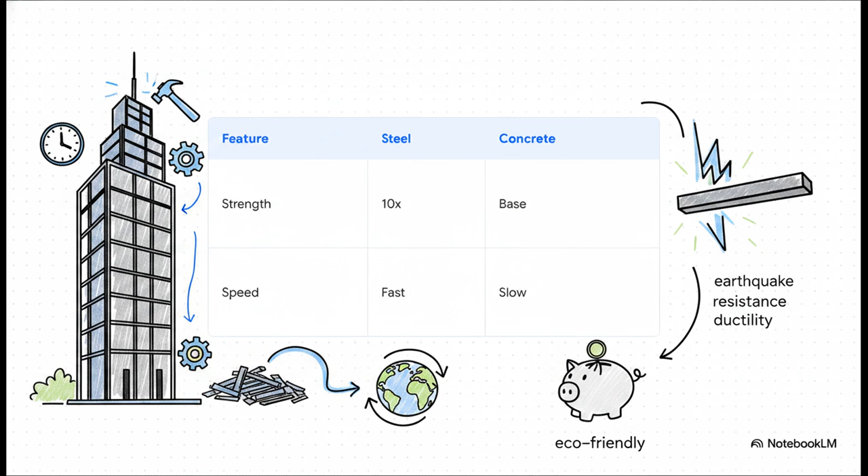On top of that, steel is super ductile and robust. Those are the exact qualities that allow it to withstand severe, sudden impacts, like earthquakes. Add in the fact that it's highly eco-friendly and easily dismantled and recycled as scrap at the end of its life, and you can clearly see why its overall life cycle cost makes it the ultimate choice. Which brings us to Section 2, the secret life of steel.

At its most foundational level, steel is simply iron with a tiny dash of carbon added in. But the magic is really in how they mix. The atomic diameter of carbon is actually larger than the gaps or interstices between the iron atoms. Because of this, carbon dissolves into a solid solution, literally squeezing right into these microscopic gaps. And by doing so, it physically distorts the original crystal lattice of the iron.

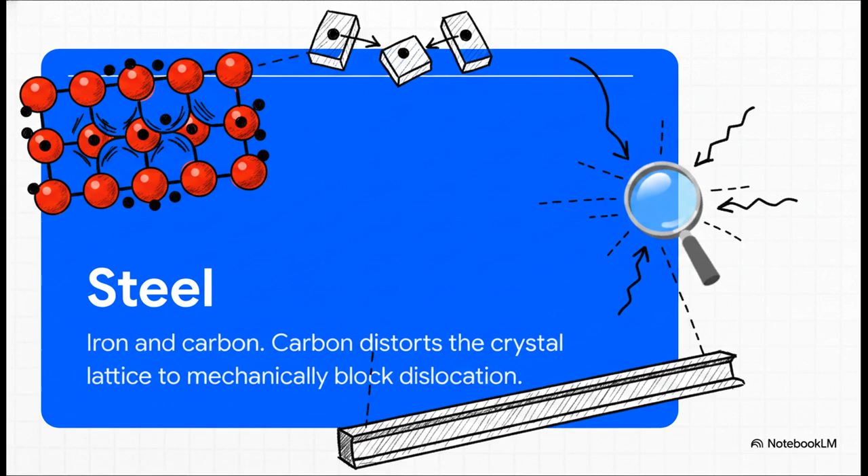You can kind of think of it like wedging tiny blocks into a sliding puzzle. These carbon atoms mechanically block the crystal lattices from dislocating or sliding past each other when a force is applied. That microscopic mechanical distortion, that is exactly what gives steel its tremendous strength.

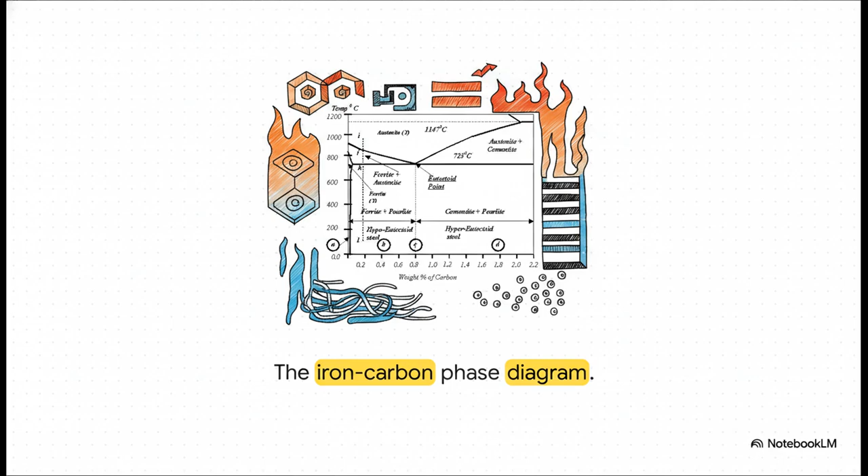Now consider the iron-carbon phase diagram. It's essentially a cheat sheet for metal. As the temperature drops, iron takes on completely different forms. Depending on the exact amount of carbon, which usually tops out at around 2%, that blazing hot austenite cools down into either extremely soft ferrite or a much harder, more complex mixture that we call pearlite. Let's move to Section 3, forging strength and ductility.

Let's walk through the actual steps of slowly cooling a standard 0.2% carbon structural steel. It's almost like a race against time. We start at Step 1, with austenite at a scorching 900 degrees Celsius. As it begins to cool into a two-phase field, we hit Step 2. Ferrite starts to nucleate, forming tiny crystals right around the boundaries of the austenite grains. Because ferrite simply can't hold much carbon, that carbon diffuses away into the remaining austenite.

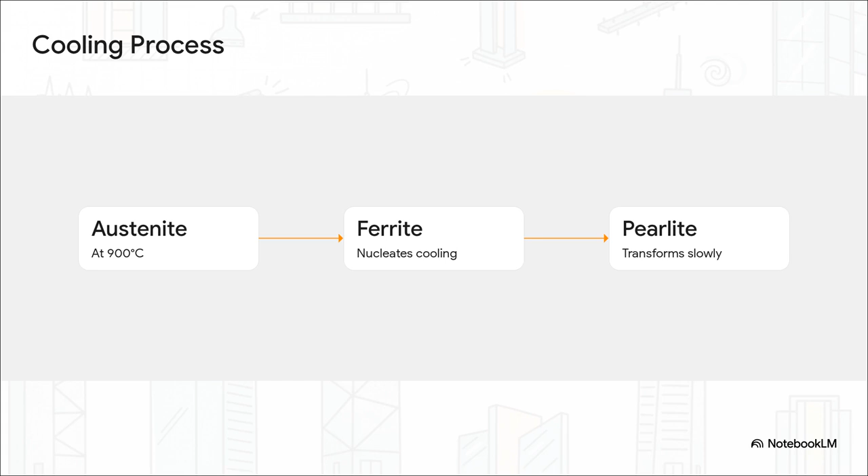Finally, in Step 3, as we cool all the way down to room temperature, that remaining carbon-rich austenite transforms completely into pearlite. We can picture this beautiful microscopic transformation happening in 3 distinct stages. First, you have the large austenite grains with tiny ferrite nuclei forming right at their borders. Next, those ferrite regions grow, effectively pushing the carbon inward. And finally, that center region becomes pearlite.

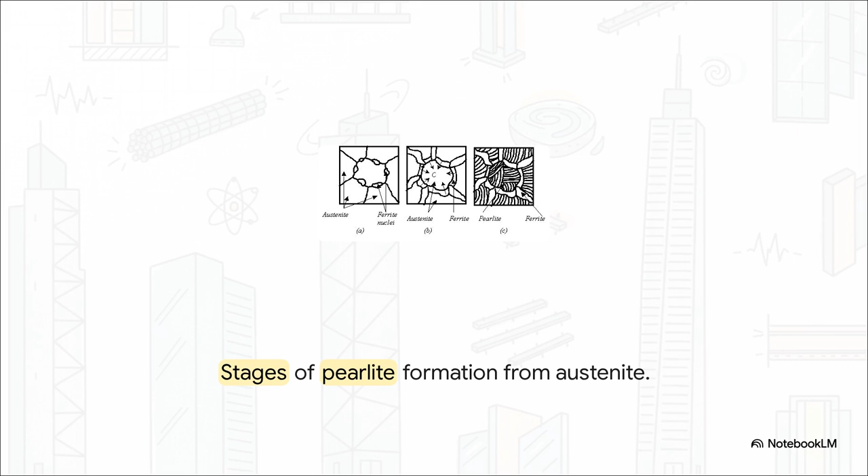Pearlite is a really fine lamellar mixture, kind of like a microscopic layered cake, made of soft ferrite and a hard iron carbide called cementite. The higher your carbon content, the more of this hard pearlite you get. That means higher mechanical strength, for sure, but unfortunately it also means lower ductility. Because of that eternal trade-off, engineers literally manipulate the cooling speed.

If we use a process called annealing, where the steel cools very, very slowly in a furnace, the carbon atoms get plenty of time to shuffle around. This creates larger grains and a highly ductile steel.

But what if we plunge that glowing hot steel directly into cold water? Well, that's called quenching. This rapid cooling violently traps the carbon atoms in place before they have a chance to diffuse, creating a crystal structure called martensite. Now, martensite is incredibly hard, but it's also very brittle. That makes it totally unsuitable for massive structural beams, even though it's absolutely perfect for something like high-strength bolts.

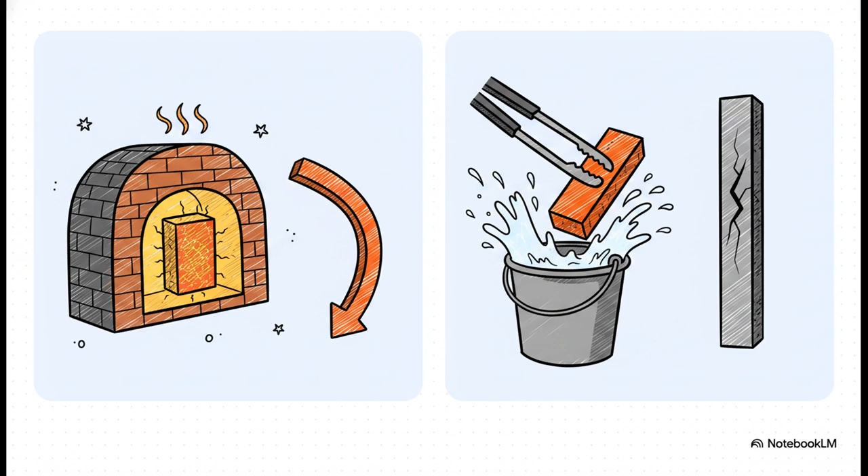Okay, Section 4, pushing to the limit. To actually trust this material in the real world, we literally have to stretch it until it breaks, period. Think about a standard tensile test specimen. A massive machine grips those precisely machined shouldered ends and pulls in opposite directions, applying immense tension. Engineers carefully measure the stress and the resulting strain over a specific gauge length right in the middle.

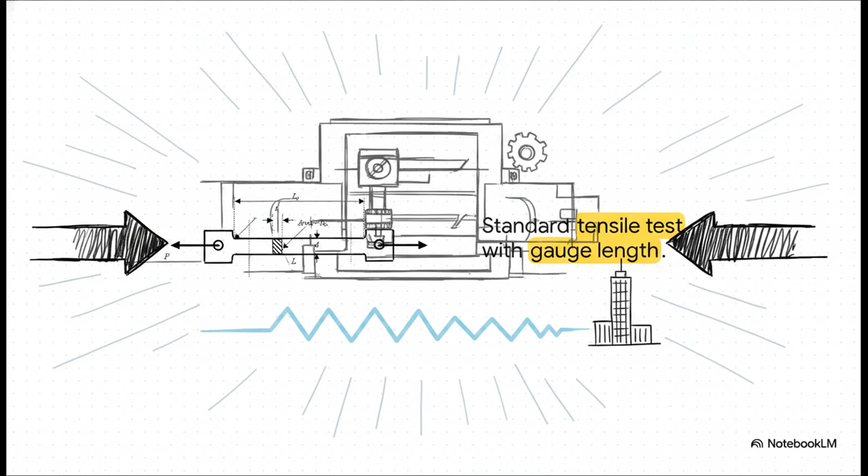The steel will stretch elastically at first, which means it would snap right back to its original shape if you let go. But eventually, it hits a yield plateau, goes through strain hardening, and is pulled apart entirely. When structural steel does finally fracture, engineers are hoping to see a very specific signature, a cup and cone fracture. This is where one broken end forms a cup shape and the other forms a cone that fits perfectly inside it.

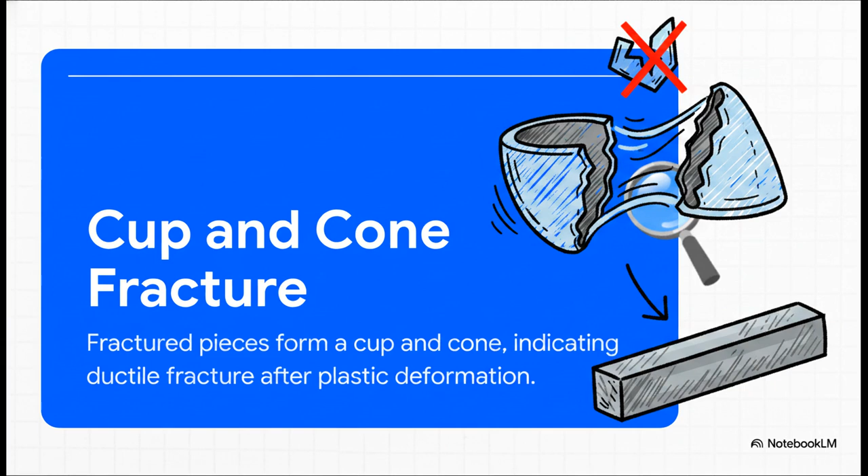Why is this so vital? Well, a cup and cone pattern proves that the steel suffered a ductile fracture. It means the steel deformed and stretched significantly before failing, giving us plenty of warning, rather than just shattering abruptly without warning, like a pane of glass.

Beyond just stretching it, we also need to test how well the steel resists scratching and denting, its surface hardness. We do this by literally forcing an indenter right onto the surface of the steel and measuring the microscopic dent it leaves behind. The Brinell method uses a hardened steel ball, while the Vickers method goes with a square-based diamond pyramid. By taking the exact ratio of the applied load to the tiny surface area of the indentation that's formed, engineers can calculate a highly precise hardness number.

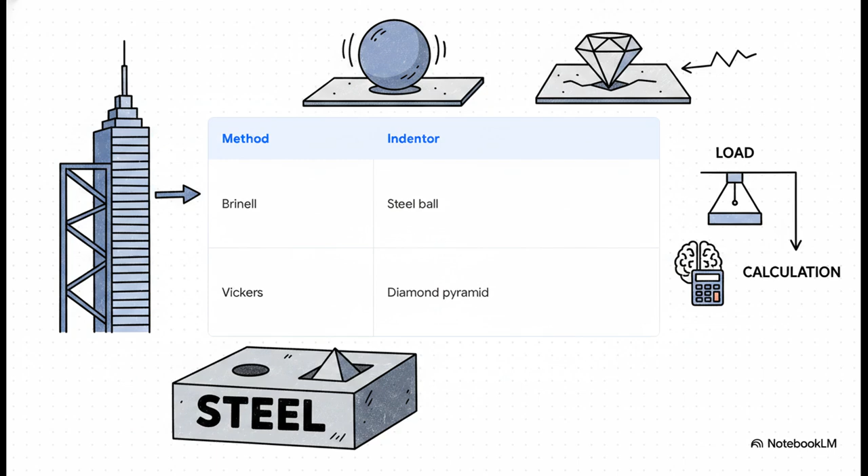And that brings us to our final part, Section 5, the science of safety. Modern structural design operates on a really brilliant philosophy, developed back in the late 1970s, called the limit state method. A limit state is simply a threshold, a condition where a structure fails to fulfill its intended purpose. And there are two main categories we look at. First is a limit state of collapse. This deals with catastrophic failure, things like metal yielding, crushing, or buckling. We require massive, non-negotiable reliability here because human lives are on the line.

The second is the limit state of serviceability. Now, this isn't about the building falling down. It's just about normal, everyday use. If a skyscraper sways so much in the wind that it causes massive deflection, or vibrates so much that the people inside literally feel seasick, it has failed its serviceability limit.

So, the absolutely crucial takeaway here is captured in one deceptively simple equation. FD must be less than or equal to SD. This is basically the ultimate blueprint for safety. FD represents the factored design loads. That's the maximum internal forces and moments caused by wind, gravity, and earthquakes. SD represents the factored design resistance, which is the actual physical strength of the steel itself. The forces pushing on the building must absolutely never exceed the material's capacity to push back.

But you know, the real world isn't perfectly predictable. So how do we actually factor in those chaotic variables? Well, the major innovation of the limit state method is the introduction of partial safety factors. Instead of just throwing out one big, clunky safety net, engineers split the risk using probabilistic math. For example, when calculating the strength needed to hold up the dead weight of the building plus the live load of people and furniture, engineers will multiply that expected load by a factor of 1.5. That extra buffer accounts for things like extreme weather or totally unexpected overcrowding.

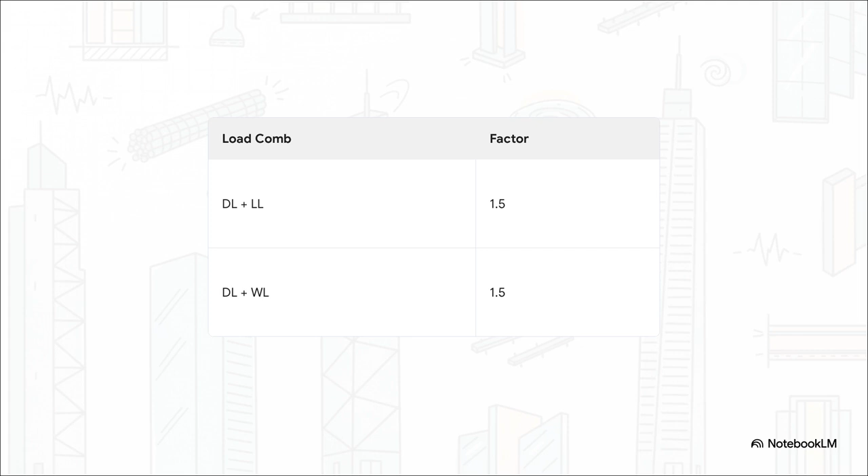Meanwhile, a completely separate safety factor is applied to the steel's strength, just to account for any tiny unforeseen manufacturing imperfections in the metal itself. It is just absolutely remarkable when you step back and think about it. Our tallest, most imposing structures are ultimately kept standing by probabilistic mathematics predicting extreme scenarios, all relying on microscopic atoms of carbon slipping perfectly into the lattice of iron.

But as we continue to push the boundaries, building taller, bolder, and more complex structures in a rapidly changing climate, it leaves us with one final thought. If our safety relies entirely on predicting the extreme, what completely unknown limit state will tomorrow's engineers and architects have to design for next?